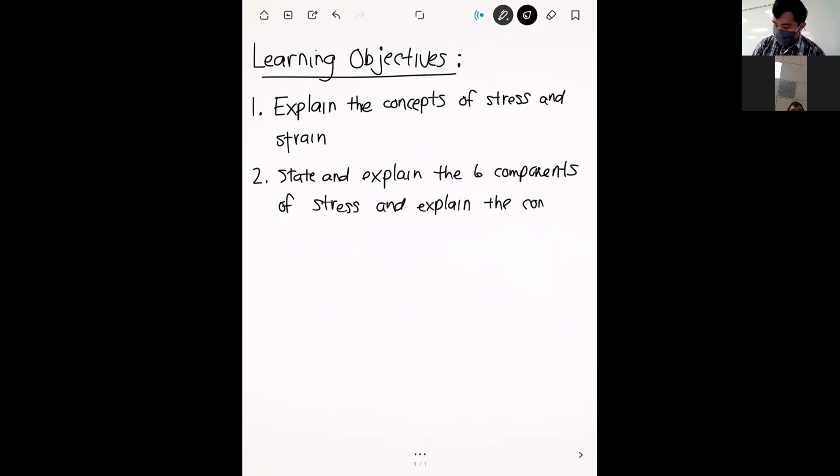Whatever, some of us made sure to point out that the provost came by the shop. I heard, yeah, she was super excited, and she was happy to make sure we got noticed as well. There was a big need there, but we had a few talking about it.

You mentioned every other week we'll be doing ANSYS work? Yeah, next Thursday is our next activity. Monday's out, early week, we're still trying to get our feet under us. We have class Tuesday, and next Tuesday we're finishing up these lecture notes, then Thursday we'll be doing an activity.

I had talked about the potential for sponsorship, we never had it before, and it had to do with something like communication, possible GPS or whatever. I said hey, might send them your way, Chris, because I know Wilbur deals a lot with radio and comms stuff, so maybe they could help. I know one of the GPS sites we have to use for cars.

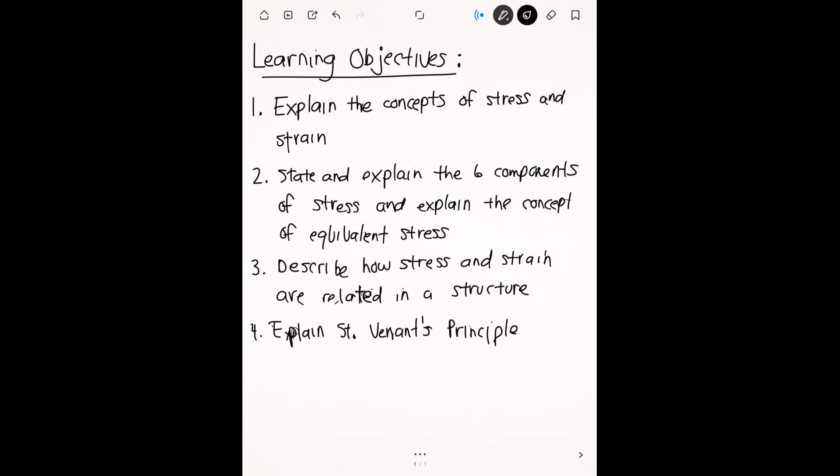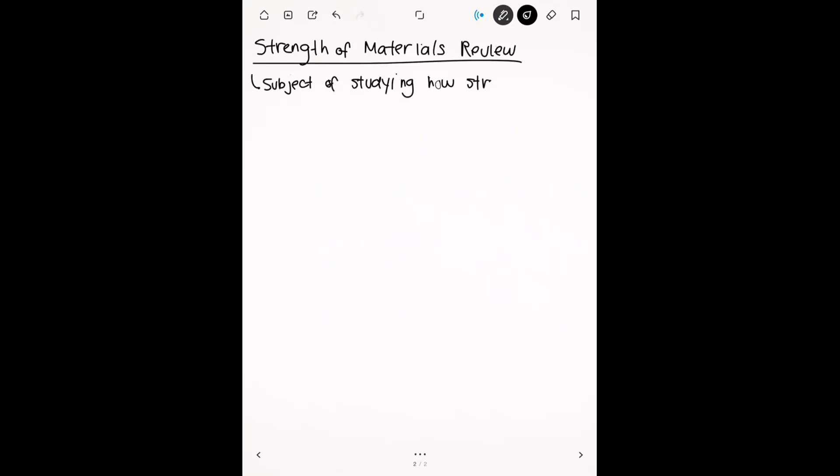This can be anything from bending your pencil inward to designing a bridge or a big building. All of those follow the same theory outlined in strength of materials.

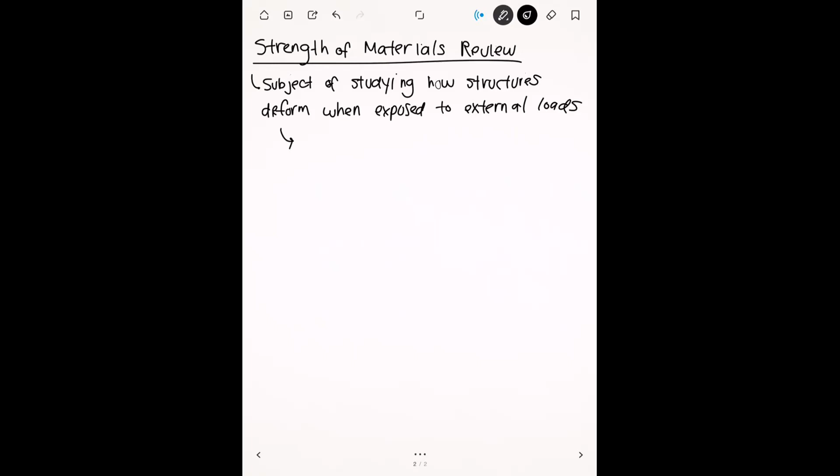A big determinant, or big factor, in determining how structures deform is the properties of the materials.

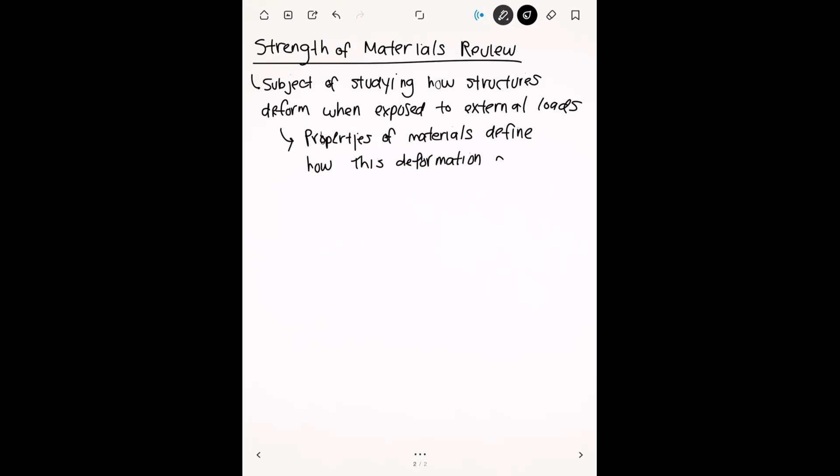We intuitively understand that different materials respond differently to different kinds of stresses. If you took a steel rod and tried to bend it, unless you're like the Hulk, you're not going to make much progress. But if you took a rod made of cheese and tried to bend it, it would bend pretty easily.

Central to strength of materials is the idea that stresses develop within these materials. So let's go over the concept of stress.

We've seen stress already. If you remember from our first activity, one of the results I asked you to show for the first ANSYS activity was how stress is distributed within that plate. We have a plate with a hole, we stretch it, and because we're stretching it, stress develops on the inside.

Let's start with the very basics, the units for stress. Stress, in its pure definition, is simply a force that's distributed over an area.

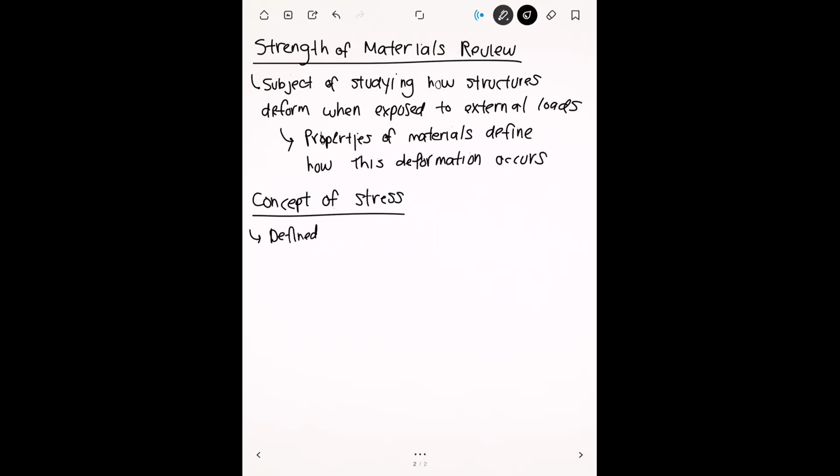Okay, and so its units is exactly that. Its units are going to be force divided by area.

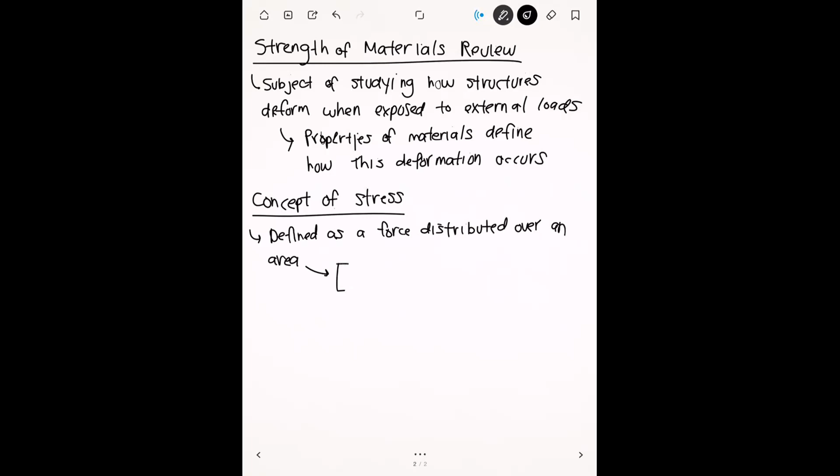This symbol sigma here, this is the general symbol that I use for stress. I think most people use sigma for stress, so it's not one of those ambiguous ones.

And so the units for that is going to be force over area. And if you want to put this in terms of SI units, the most common unit for that is going to be the Newton, which is a unit of force, over a meter squared, which is a unit for area.

And this has a special name because it was named after the guy that came up with it, right? So he was the genius that said, let's put force over area and let's name it after me. And so the SI unit for stress is the Pascal, abbreviated as Pa.

Stress, definition-wise, is pretty straightforward, but it's also not the only thing out there that has units of force over area. Another quantity that you might be familiar with is the whole concept of pressure.

And so pressure, if you remember from maybe like a fluids class or something, also has units of force over area. So one common question that I get a lot is, what's the difference between stress and pressure, and when do we use both? Because they both, unit wise and dimension wise, are exactly the same thing.

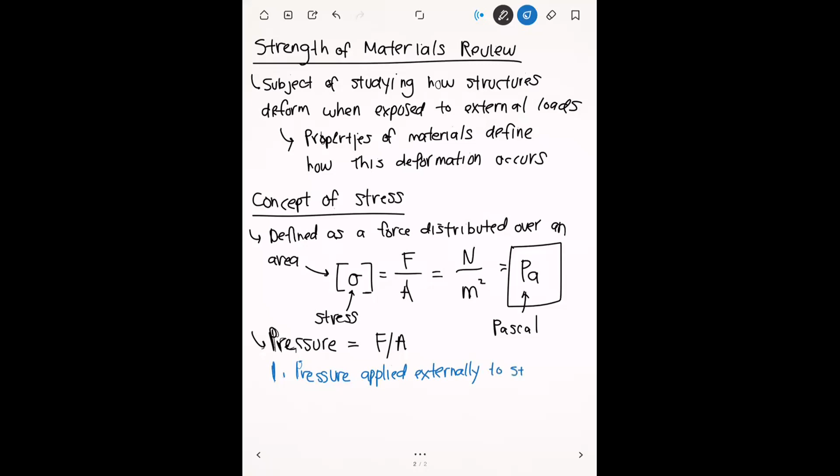So think about the boundary condition that we applied on our first ANSYS activity. To apply that tensile load, we applied it as a pressure, because that's an external force that we're applying onto our structure from the outside.

And so one way that you can remember this is you can think of pressure as something that's applied to you, right? So maybe like your professors are applying pressure to you by forcing you to do assignments and exams, things like that. It's something that's applied externally.

On the other hand, stress is something that develops internally to a structure in order for it to maintain equilibrium with its outside.

And so one way to kind of remember this is you can think that you develop stress, or you get stressed because of the pressure that's applied to you. Professors apply pressure to make you turn in homeworks, and you get stressed because you want to complete them. That's kind of how to remember the two of them.

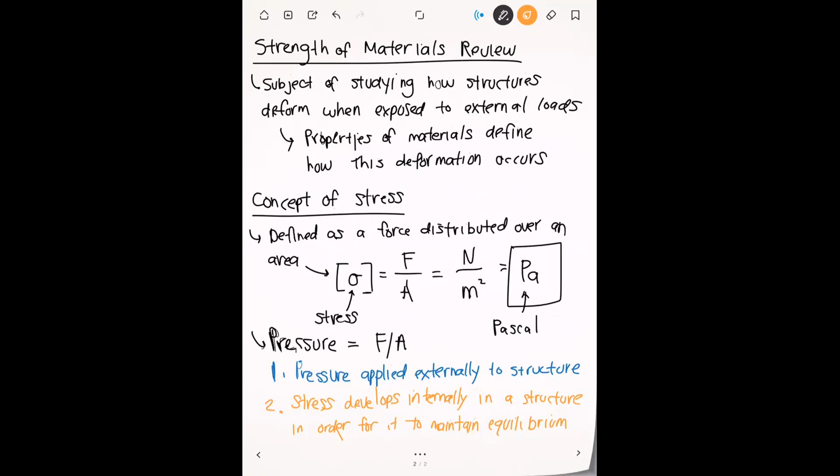All right, so let's do a simple example to kind of illustrate the whole concept of stress. You might have seen this example before in a previous class. Let's consider a simple rod that's in tension.

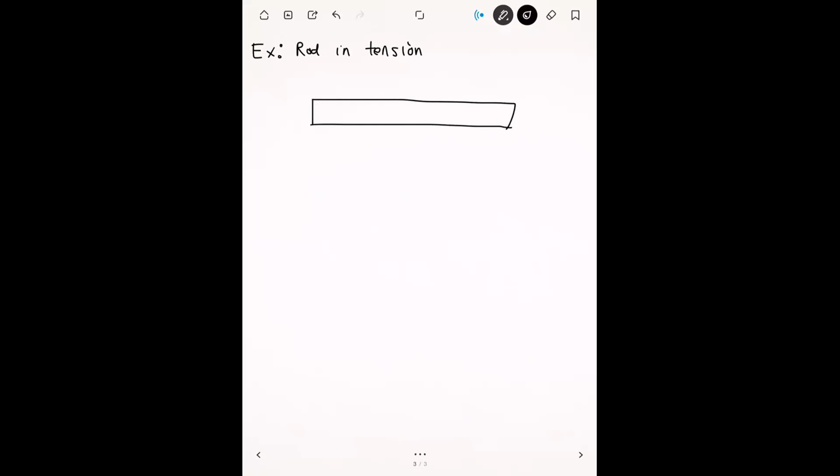We're pulling on the rod on both sides. And so we know that this rod is in static equilibrium because all the forces are going to cancel out.

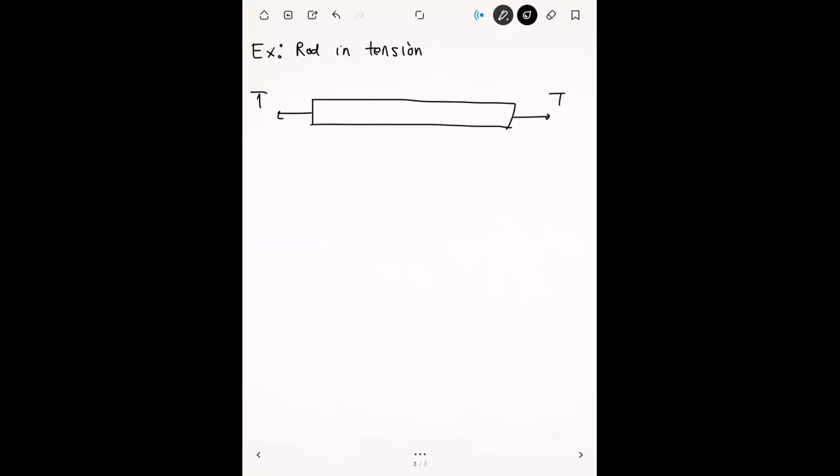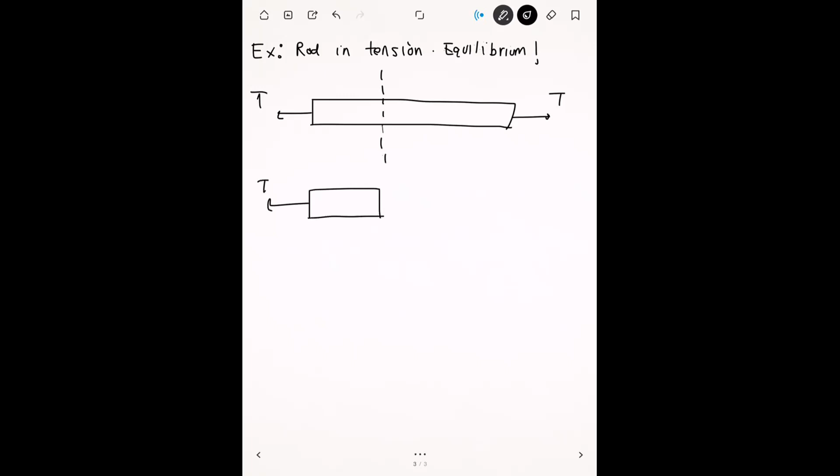And so when I say that this rod is in equilibrium, that means the entire rod is in equilibrium. And so that means if we slice this rod, let's say that we slice it like that, in order for this segment here to be in equilibrium, we also need to have some kind of force that opposes the tension like that.

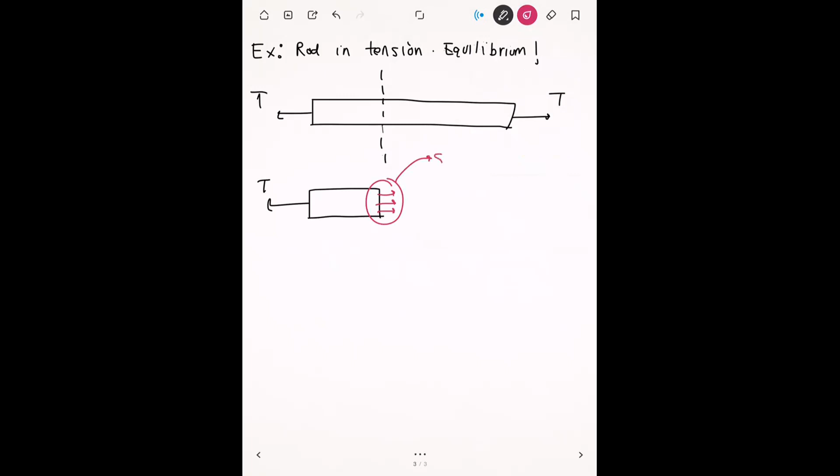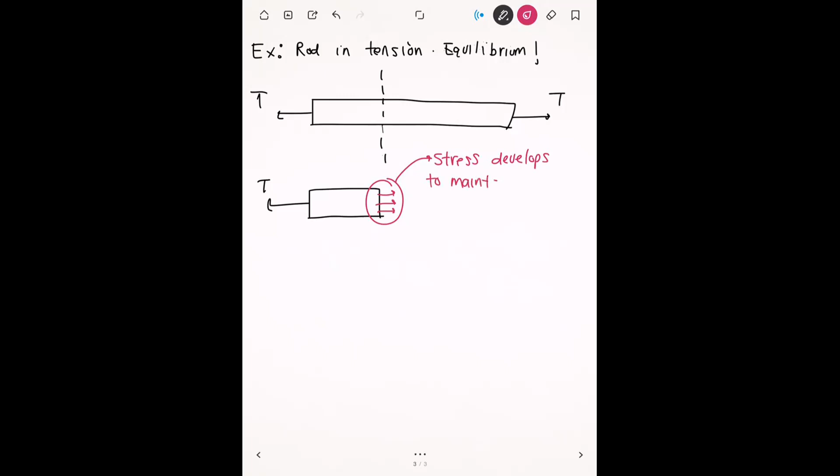And this internal force that's needed to maintain equilibrium, we call this the stress. And so we know that the symbol for stress is sigma.

And so just from a simple equilibrium equation, if we sum up all the forces here and set them equal to 0, we can come up with an expression for sigma for this case. On the left side, we have the tensile force T. This has to be equal to the stress multiplied by the area, because remember, stress is a force divided by an area, so in order to get force back from it, we have to multiply it by an area. This area, this A right here, is the cross-sectional area of the rod.

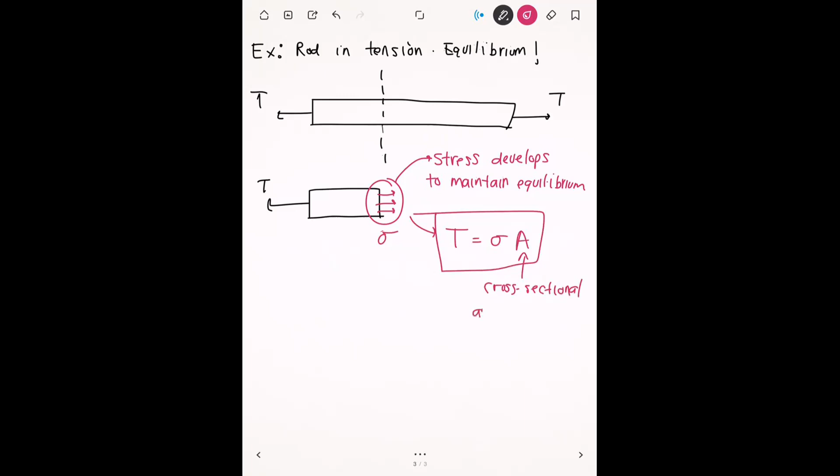Okay, right, so fairly straightforward. Okay, and so we have a situation like this where we have this straightforward equilibrium, right?

But I think a fair question to ask is, let's say we have the same kind of cross section here, and we have our applied load T. A fair question to ask is, why don't we just have another T that shows up inside the middle right here? Why don't we just have a point force that's there to oppose the load? Because in the end, you get the same thing, right? You get a situation of static equilibrium because both of those T's cancel out. So why don't we have this?

So why do we have to bother with the stress and multiplying by the area? The reason we don't have this is because whenever you have a structure with any kind of cross-sectional area, any forces it experiences are always going to distribute across the entire material.

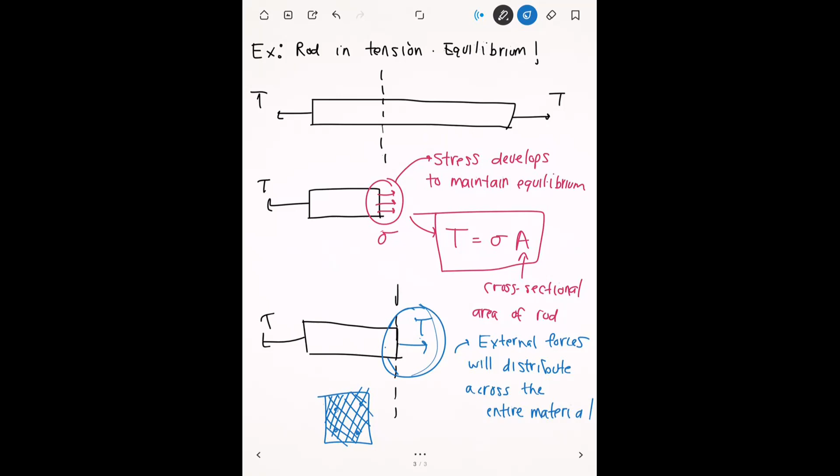And the way we express that mathematically is through stress. So when you're talking about forces internal to a structure, you usually talk about it as stress, because that encapsulates the fact that this force is going to be distributed very evenly across the entire material. Any questions on this? Okay.

All right, so let's go over the different kinds of stresses you can see. There are two different kinds of stresses I want to talk about based on the direction they act. The first type of stress is a normal stress, which is actually the one we saw on the previous page. A normal stress acts perpendicularly to a surface. So if you have a surface that's vertical like this, the normal stress is going to act horizontally to it.

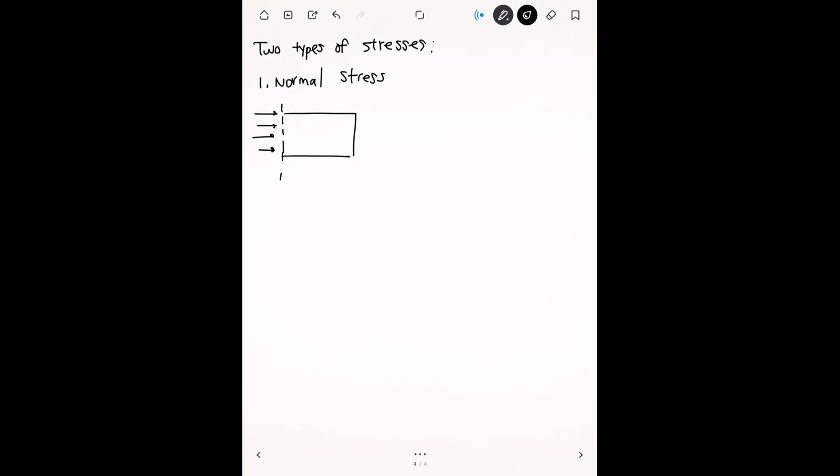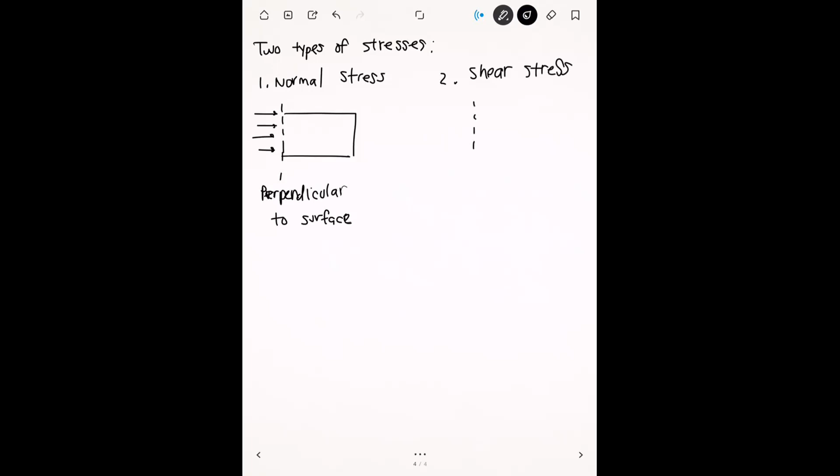The other type of stress that we have is a shear stress, and the shear stress acts parallel to the surface.

Stress is actually a pretty complex state, so it's not just a single value that a structure experiences. It depends really strongly on the direction as well — whether the direction is parallel or perpendicular to the surface, but it also depends on the Cartesian directions too, so it depends on X, Y, Z.

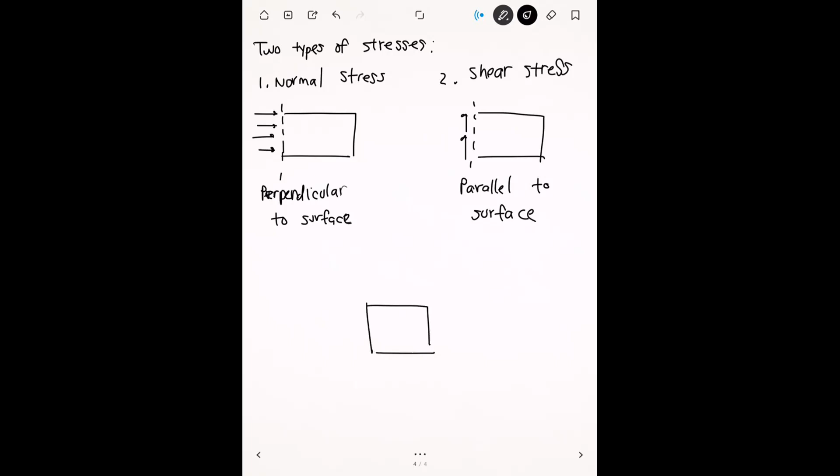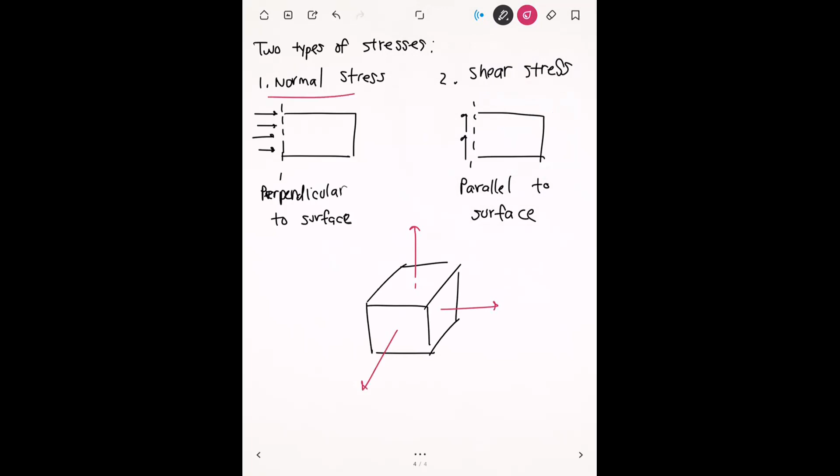So if I draw the most arbitrary case — if I draw a cube like this — this cube could represent a small particle that may be on the inside of your structure. This cube is going to experience normal stresses and shear stresses as well. The normal stresses I've highlighted in pink, and the shear stresses I'll do in blue. You can see that all the normal stresses act perpendicular to the surface on which they're acting, whereas the shear stresses are parallel to it.

So in addition to having two different kinds of stresses, we can also characterize the stresses in terms of which direction they act.

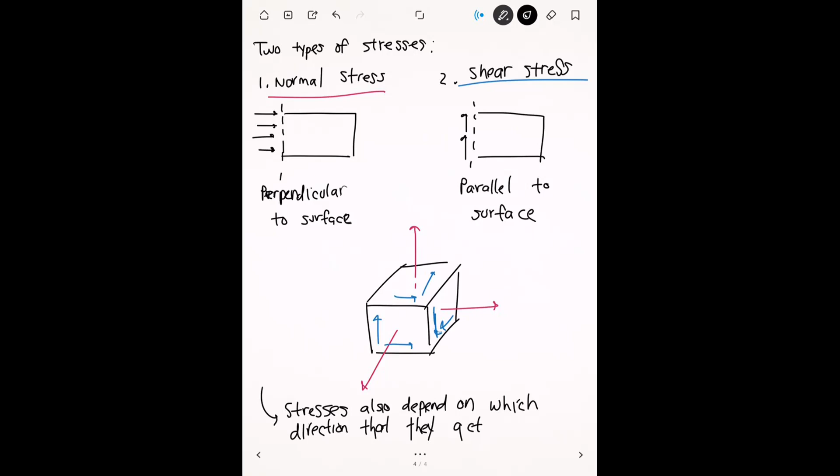All right, so let's talk about the stress tensor then, just to write it down so we're on the same page. The stress tensor is a mathematical quantity which represents all the complex state of stress that can happen in a structure. We give it the symbol sigma, and it's a matrix, so I put a line under it. This matrix is 3 by 3, at least in an arbitrary case for a 3-dimensional solid.

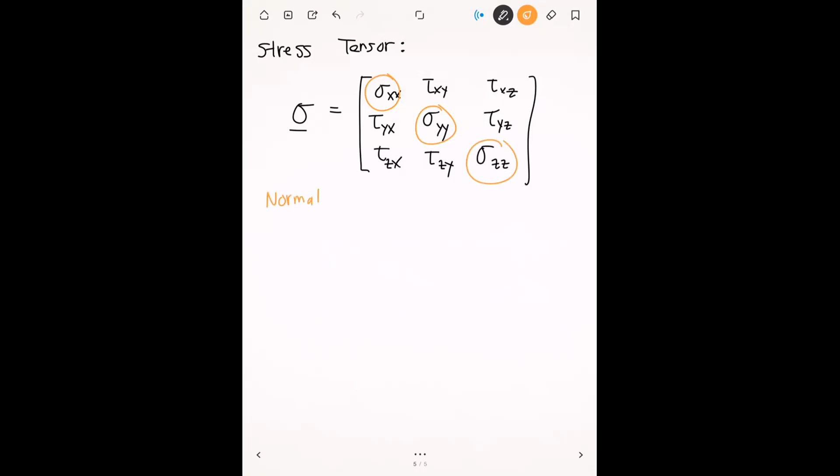That's our stress tensor, and we know there are 9 components. Everything on the diagonal here, those are our normal stresses, and everything on the off-diagonals, these are our shear stresses.

One thing we know about this in particular is that this stress tensor is symmetric. So tau xy is equal to tau yx, tau xz is equal to tau zx, and tau yz is equal to tau zy. So in the end here, we only have six unique components, and the other ones are just mirrored across the diagonal.

So in summary, what I want to illustrate to you guys is that stress is complex. When you're describing stress within a structure, there are lots of different things to account for and lots of different stress components.

Let's bring this back to our ANSYS activities. In our ANSYS activity, what I asked you guys to show was the equivalent stress distribution within the solid. If you remember from the activity, when you were looking at the equivalent stress, you were looking at kind of a heat map of where stress was highest or not, and there's a color bar on the outside showing what red represents, what orange and green represent, and so on.

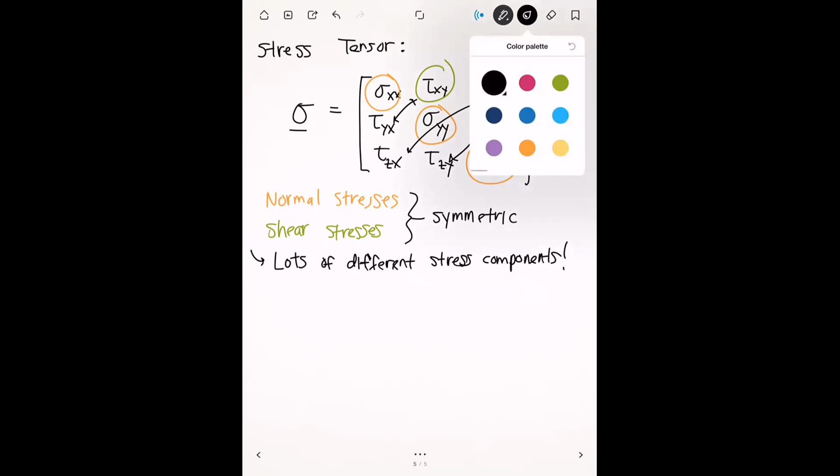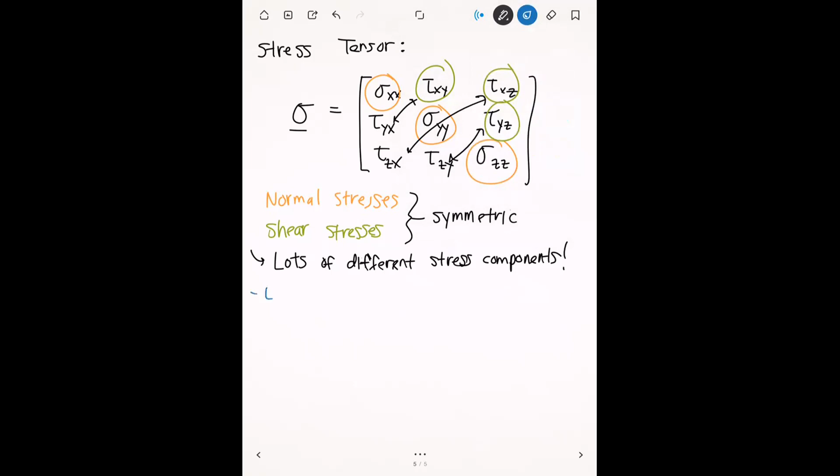But what I want to highlight to you guys is that when you're viewing those results, when you're viewing the equivalent stress inside ANSYS, you're only viewing a single number. Okay, same for the principal stress too - the maximum principal stress.

If we're only viewing a single stress value inside ANSYS, then I think a fair question to ask is: which stress are we viewing? Because we have six here. Are we viewing this one? Are we viewing this one? Is it going to be sigma ZZ? Is it any of the shear stresses? If we're only viewing a single stress, the question is which one are we viewing, and which one is actually most important for us to see?

The answer to this is that you're kind of viewing all of them at the same time. What I mean by that is you can take the 6 different components here and put them into a formula to compute just a single stress value. I'll call this an aggregate stress value.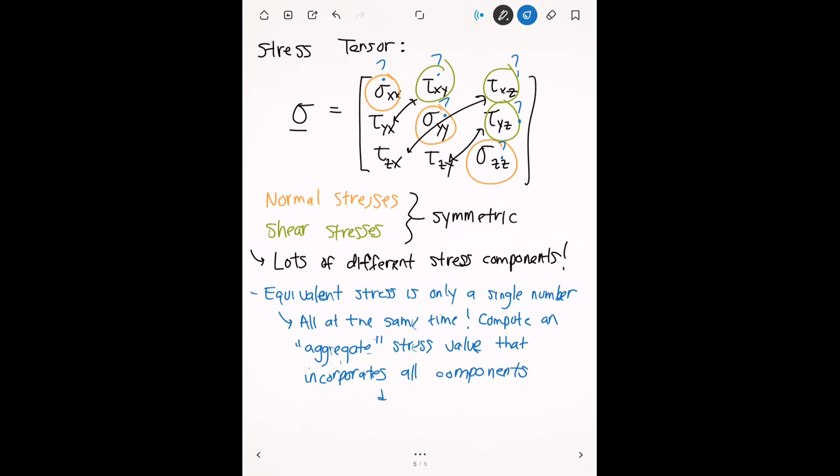So there's a formula that ANSYS is using underneath the hood that incorporates all these different stress components. The formula that ANSYS uses for this is called the von Mises condition. That's why in ANSYS, when you view the equivalent stress field, it calls it the von Mises stress.

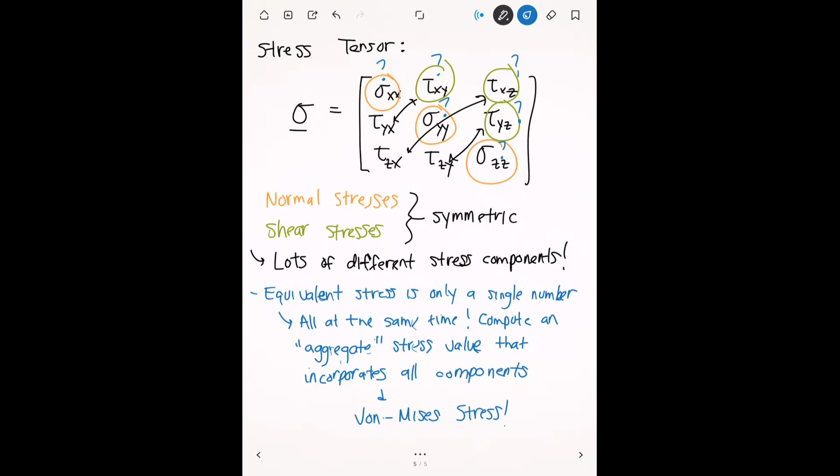On the next page, I'll write out that formula for you, just so it's not something you have to memorize, and it's not anything we're actually going to manually compute ourselves. But it's mostly for your reference, so you know exactly how it takes into effect all the different shear components and the normal components. Any questions on this? All right, so here's the formula for the von Mises stress.

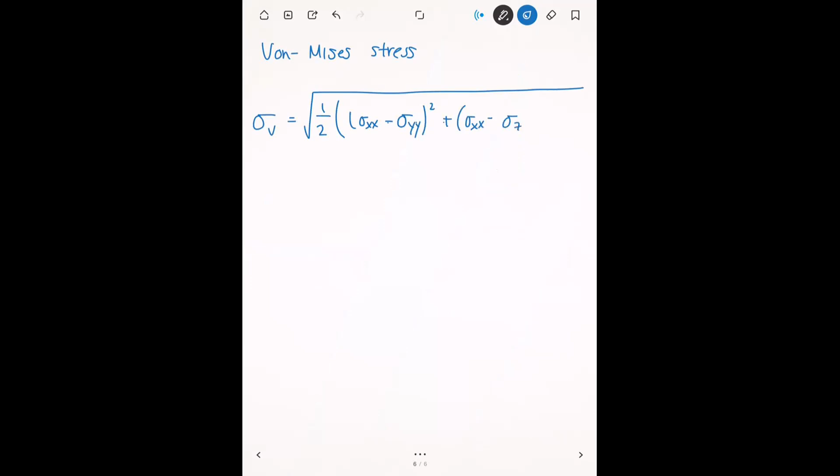We'll call this sigma V. We take the square root of 1/2 times the sum of the following: sigma xx minus sigma yy quantity squared, plus sigma xx minus sigma zz quantity squared, plus sigma yy minus sigma zz quantity squared. So for every combination of the normal stresses, you take the difference and square them, plus 6 times each of the shear stress components squared.

So we have tau xy squared plus tau xz squared plus tau yz squared, one more parenthesis, and this is all under the same square root. I kind of ran out of space, but all of this is under that square root. This isn't something you need to memorize or compute by hand, it's just for your reference, so when you ask ANSYS to compute equivalent stress, now you know exactly what it's computing for you.

All right, so that's the von Mises stress. Now the question is, how do we actually use this? We've looked at the von Mises stress inside our plate, and it's something we're going to continue to look at for the rest of the semester. A fair question to ask is, what is this actually used for, or why do we even care about the von Mises stress to begin with? The most common way that we use the von Mises stress, or equivalent stress, is to determine whether a structure is going to fail or not.

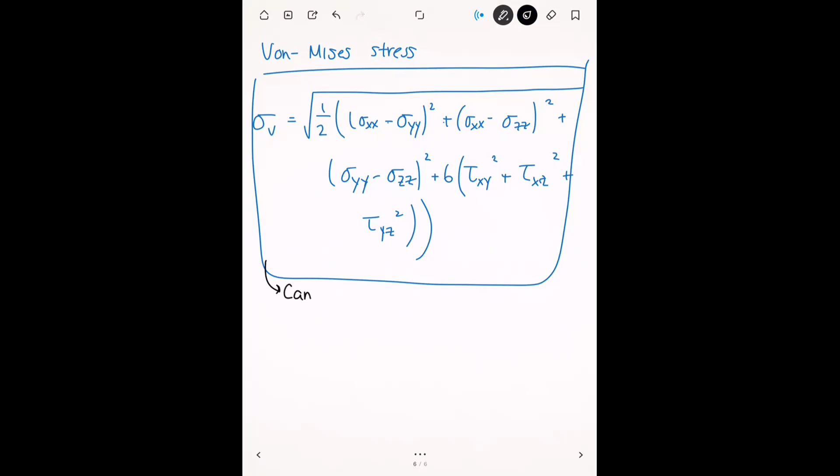We'll do this in the activity next week. One thing you can look up for every material is a parameter called the yield strength, or yield stress. The yield strength is a value of stress, and what it tells you is that if the equivalent stress ever exceeds the yield strength, then the structure is going to fail.

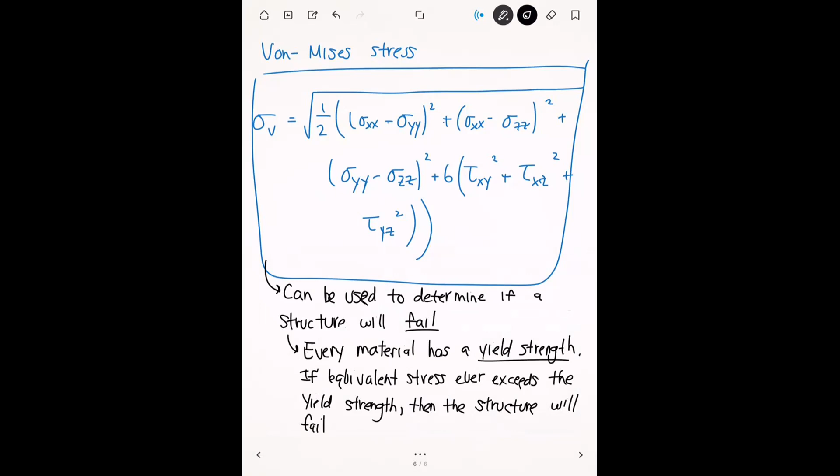Next week we're going to do an activity where I'll have you guys do a finite element simulation of a bike crank. The bike crank will be subjected to a certain amount of load, and I want you to determine whether it's going to fail under those loads. Once you have that information, you can make some comments on the bike crank's design. If you determine it's going to fail, you can modify the design to make it stronger. Or if the bike crank is very far from failing, very safe, maybe you can shave away some material from it to cut down on manufacturing costs. So that's a little sneak preview of what we're going to do next week.

Any questions on this?

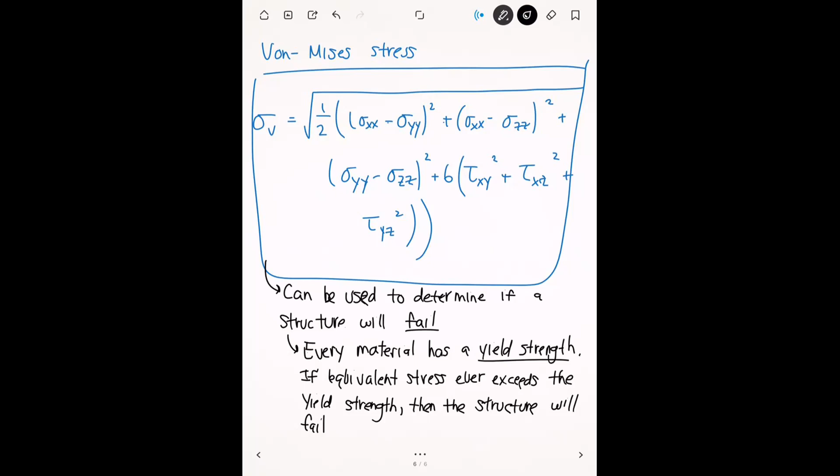All right, so that's stress. Now let's go over the concept of strain. Strain is the other important quantity for strength of materials that we need to know. The whole idea with strain is that it's a measure of how much a structure is deforming relative to its original configuration.

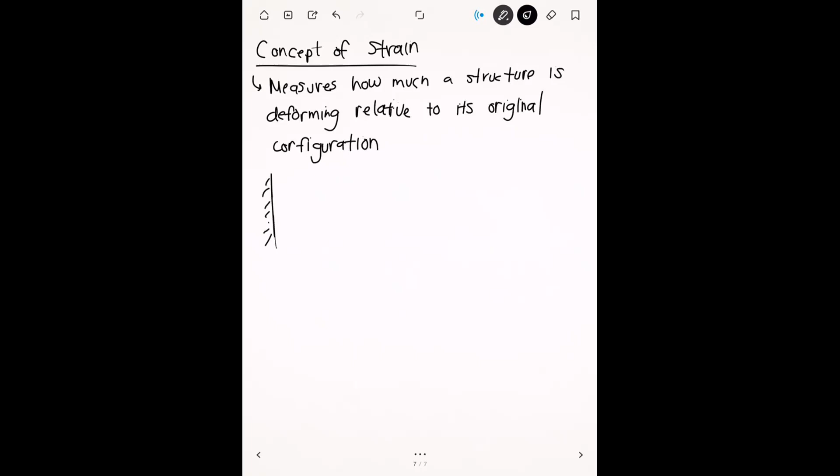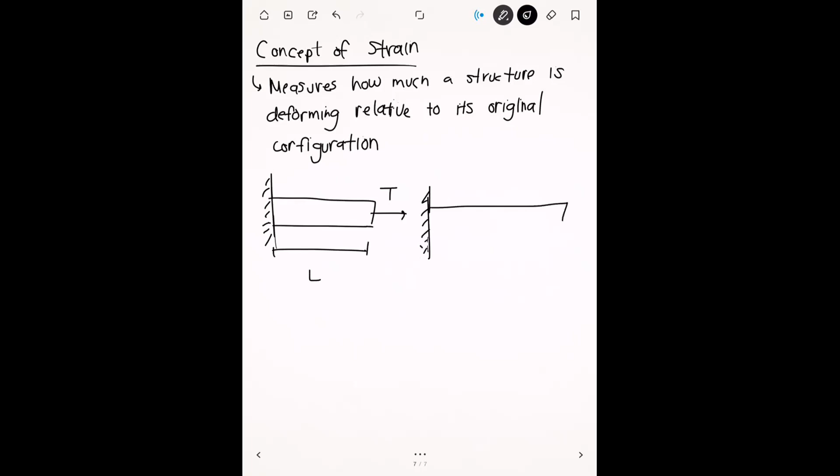The classic example, probably the easiest one to understand, is if you have a rod that's fixed to a wall, and this rod has some initial length L, and let's say you're pulling on it with a tensile load T. In response to that load, the bar is going to get longer. So the original length was L, and in response to the load, it increases in length by an amount delta L. The strain in this case is just going to be the change in length, delta L, divided by L, the original length.

So the important thing about strain is that it's unitless, it doesn't have any units because we basically have a length divided by the length. That's always going to have no units, because remember, it basically represents a relative change, and whenever you have anything relative, you're taking the ratio of one thing over another thing, so it's always unitless. This is an example of strain in a 1D case, but in 3 dimensions, strain can be a 3D thing.

The mathematical definition of strain is that you take the displacement, which is u, and then you take a derivative of the displacement in every single direction. This is basically how ANSYS is defining the strain under the hood, and this ends up being a matrix as well, or a tensor.

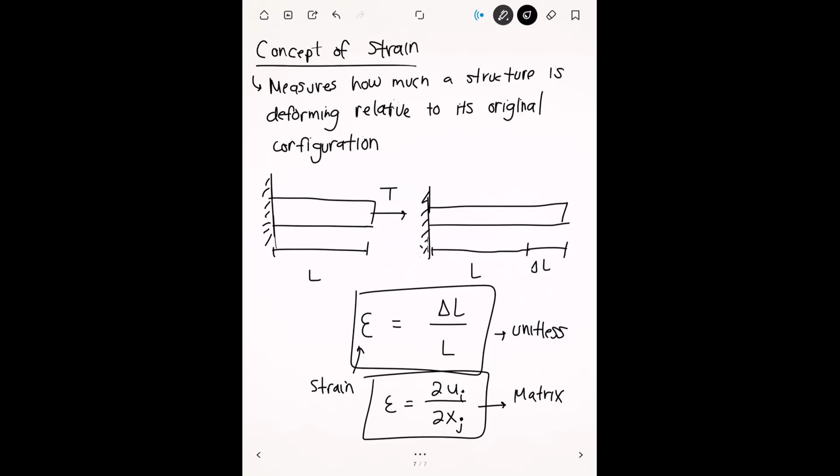Any questions on strain? All right, so stress and strain are very intimately connected inside a material. Not only do they have similar mathematical definitions, but they also have a strong effect on each other too.

Actually, the exact relationship between stress and strain is determined by what type of material you have.

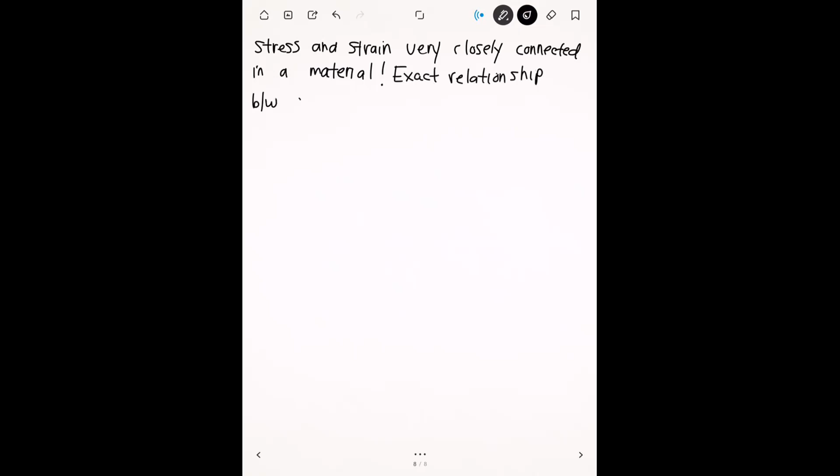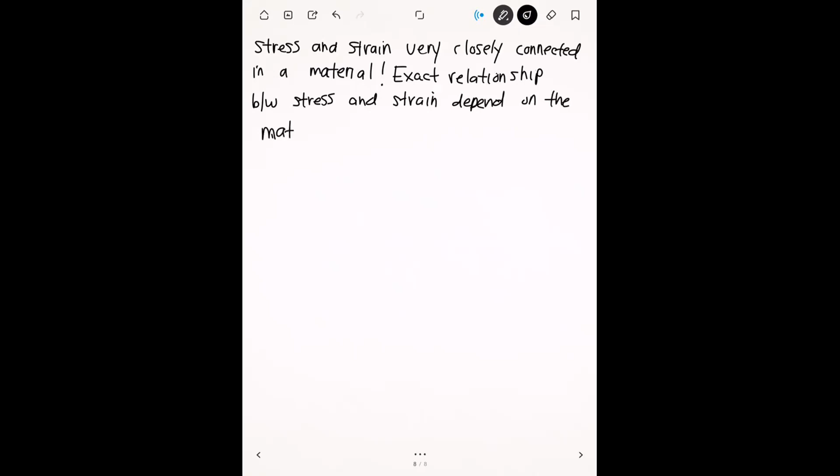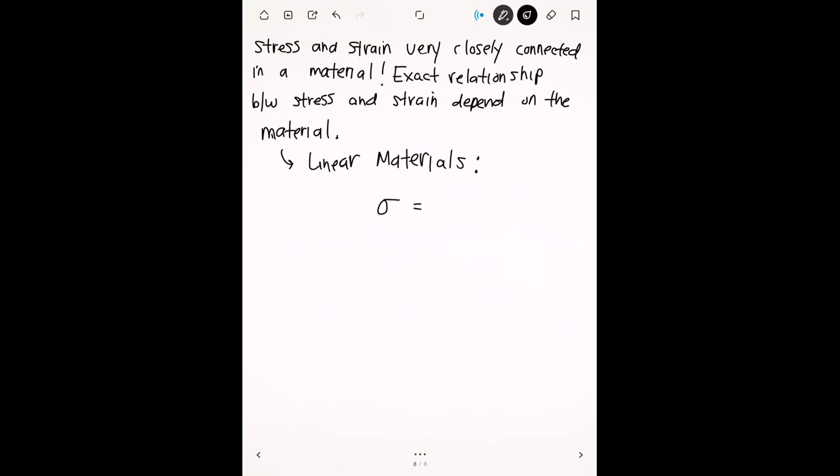The simplest relationship between stress and strain is a linear one. I think it's the first one that everyone learns in their strength of materials class. For linear materials, which covers most of your metals - most metals are linear because of their molecular structure - we have that the stress is equal to the Young's modulus multiplied by the strain.

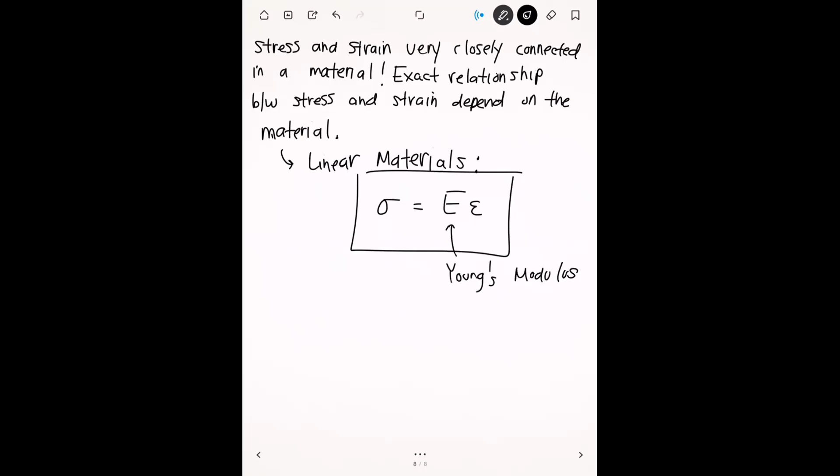I think we went over this equation on Tuesday. This linear relationship is known as Hooke's law. This is the simplest case where in order to get stress from strain, the only thing you have to do is multiply by a number, and that number is the Young's modulus.

But it can definitely get a lot more complicated than this, especially when you talk about things like composite materials, anisotropic materials. One that's becoming a lot more popular nowadays is 3D printed materials. 3D printed materials, just by the nature of how they're manufactured, very rarely follow this relationship - a lot of times you have to take the printing direction into account when modeling those materials. But if you're talking about a pure metal manufactured in a traditional way through milling or cutting or lathing, this relationship holds pretty well.

A lot of the problems we're going to do in this class will be for linear materials, but we will talk about what you would need to do for different kinds of materials as well. So any questions on this?

All right, so let's go over the concepts of principal stress, because I did ask you guys to look at principal stress for the assignment as well.

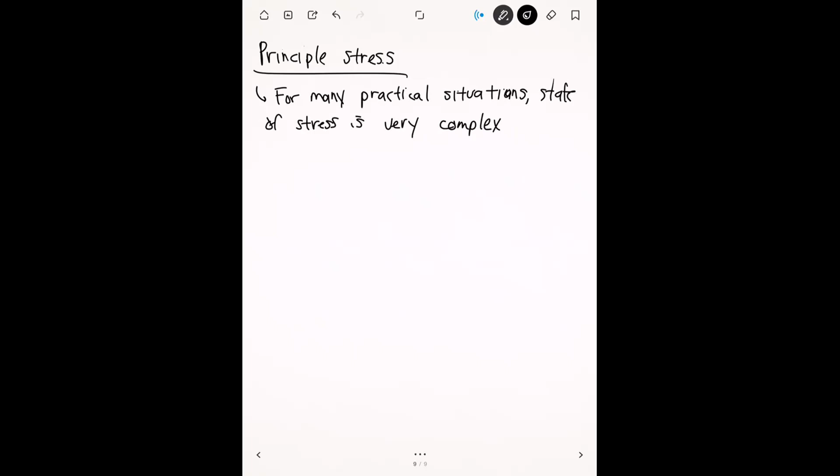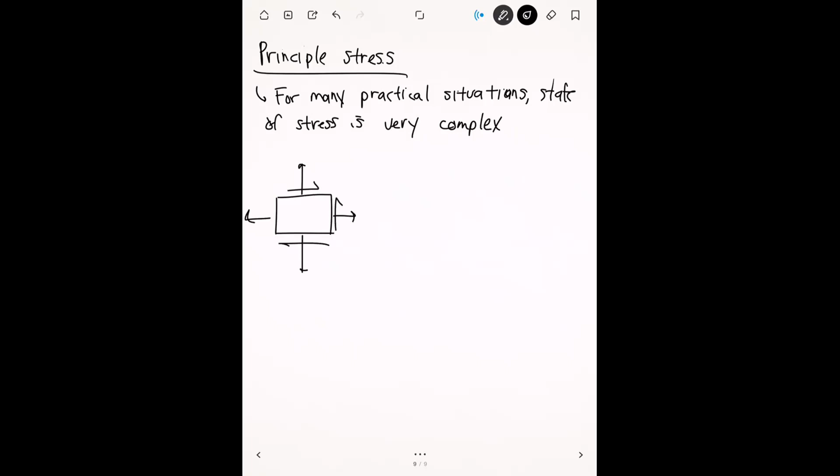Let me do a 2D case so you can see what's going on. Even in a 2D case, we have lots of different stress components: all the normal stresses acting normal to the surface, but also all the shear stresses acting parallel to it. This is complicated because if you're considering all the different stress components, there's a lot to keep track of. So a lot of times we like to simplify this, so we can examine a simplified version of the state of stress.

One way to simplify the situation is to simply perform a rotation. If we rotate it, and we're a little bit smart about how we rotate the state of stress, we can reach a state where there's no longer any shear stresses. The idea is to take the same patch of material and perform a small rotation, such that all the shear stresses either cancel out or get added into the normal stresses. In the end, we end up with a situation with just normal stresses.

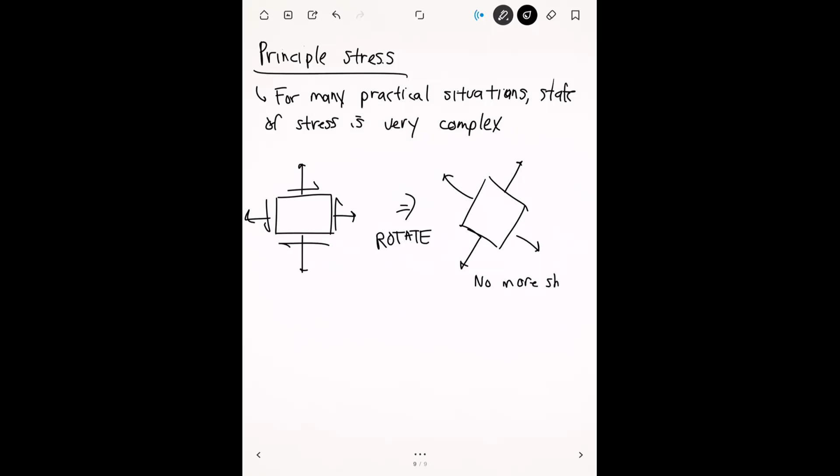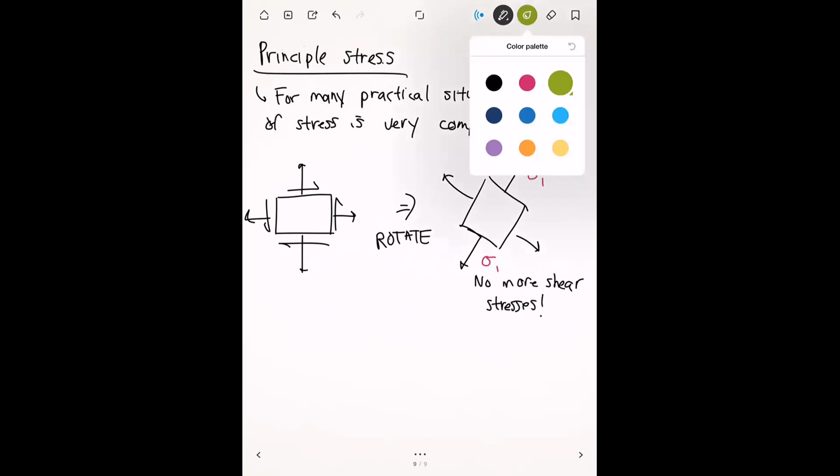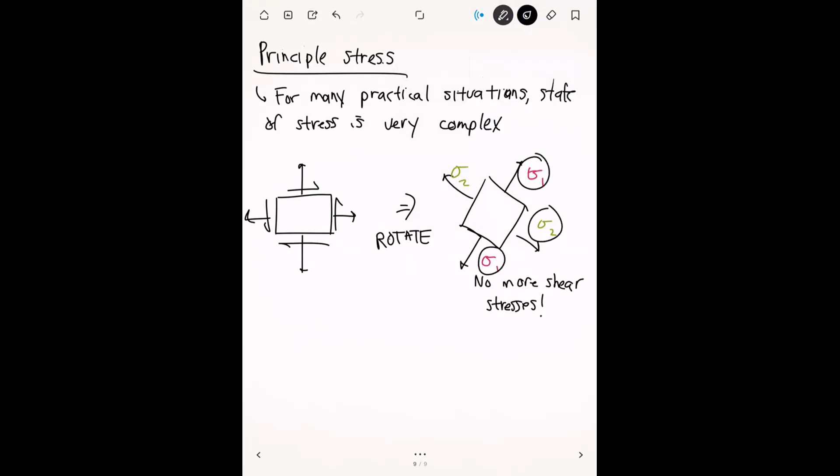We get a situation where we can characterize all the different normal stresses. I'll call those two sigma 1, the first principal stress. And then the ones on the perpendicular faces we'll call sigma 2, the secondary principal stress. This is convenient, because instead of looking at this really big stress state, we're looking at these ones, describing the stress state in terms of these principal stresses. In 2D we have 2 principal stresses, but in 3D we actually have 3.

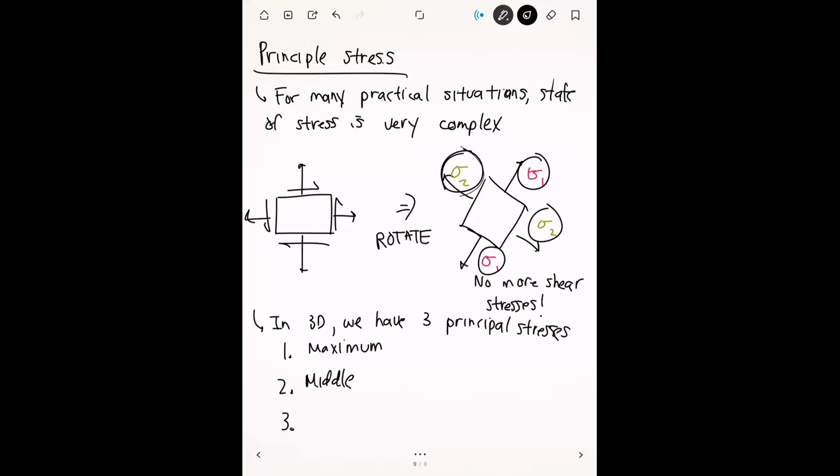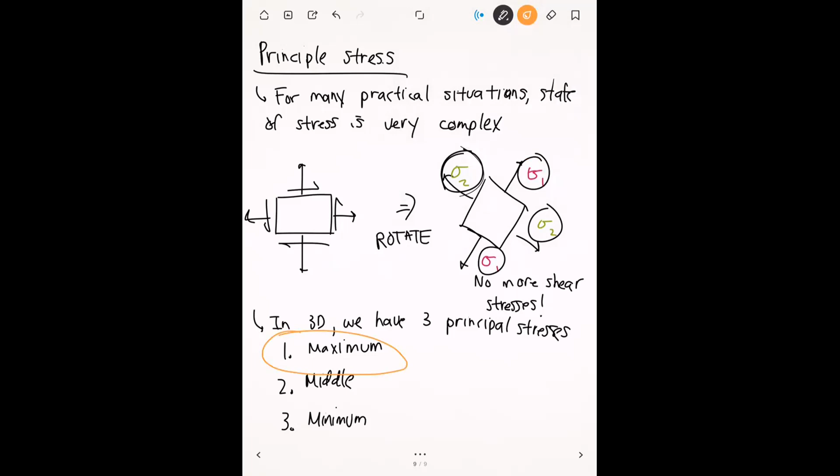Their names are based on what their numerical values are: you have the maximum principal stress, the middle principal stress, and the minimum. What I asked you guys to do in the activity was to find the maximum principal stress, which is basically the maximum of the 3 principal stresses that you got from performing this rotation.

Again, principal stresses aren't often used for anything super practical, just because it's more of a mathematical and theoretical thing, a flex, I guess, that you can rotate and get into this weird stress state. But it's kind of a cool thing to look at, because one interesting thing to do is compare the maximum principal stress to what you got for the equivalent stress.

Remember, the whole point of principal stress is that it transforms your stress state into basically a normal stress, and normal stresses are going to be either compressive or tensile. So if you compare the maximum principal stress to the equivalent stress and they're similar values, you can say the biggest contribution to the equivalent stress is mostly from compression or tension. But if they're different, you probably have a big contribution to shear to your equivalent stress.

But there are also better ways to determine whether you have shear stresses or normal stresses. This is just so you guys know what principal stresses are and how to differentiate them from equivalent stresses.

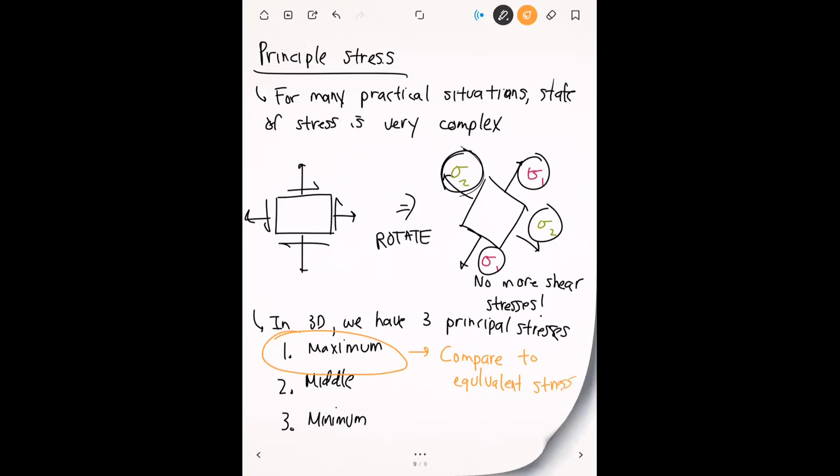That's different from the maximum principal stress. Imagine a generic structure, let's say we have our plate with a hole like this, and we want to find the stress at this point right here. There are three principal stresses here: the maximum, the middle, and the minimum.

So when I say to find the maximum principal stress, that means find the distribution of that first principal stress everywhere. But when I just say maximum stress without anything, I mean the maximum equivalent stress and where it is on the structure. It's a little bit of word ninja stuff, but once you understand the difference between them, it becomes more clear.

All right, any questions on this? Okay.

All right, so let's talk about stress strain relationships. We talked about the linear one before. We've seen that there are materials out there where the stress strain relationship is linear. And if you plot the stress strain curve, it looks something like that.

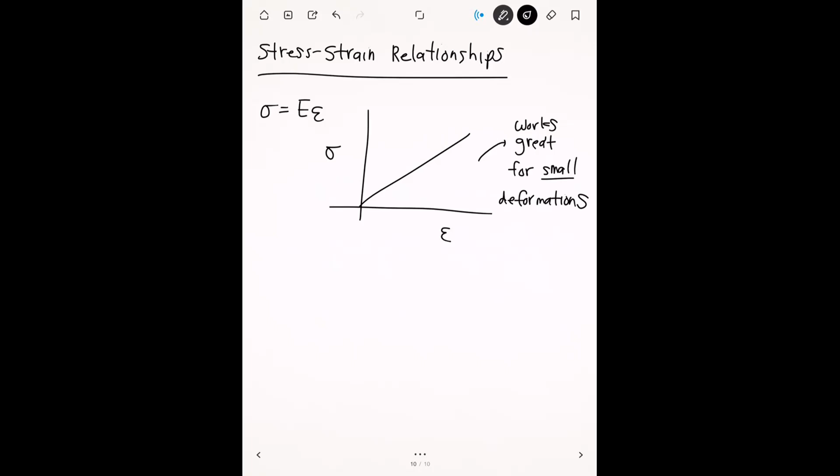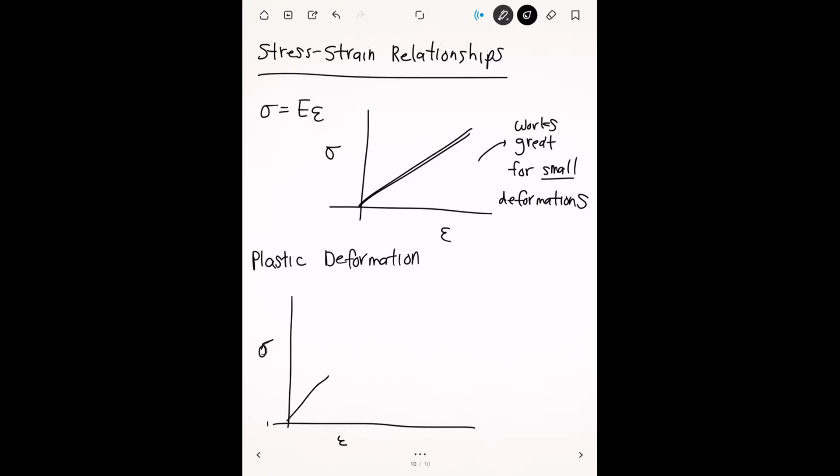But once you start getting away from small deformations, once your deformation starts to get larger, you have to start taking plasticity into account. Probably you guys know already that once you get past this linear regime here, the stress strain relationship is no longer linear. There's always a linear portion right next to the origin, but once you reach a certain threshold, the stress strain relationship starts to look something like that. This right here is plastic deformation.

So there's a way to turn this on within ANSYS, because if you don't turn it on, ANSYS won't account for it.

In ANSYS, there's a toggle or checkbox for large deformations. If you have a situation with large deformations inside your model, you have to make sure this setting is turned on so you can actually simulate that. Because if you don't, ANSYS is basically going to assume that this linear relationship will maintain all the way until infinity.

If you draw a dotted line, ANSYS is going to assume that this linear relationship continues all the way up here, even though in reality the material was going to reach plastic deformation way before that. So you need to make sure that if you do have large deformations, you turn that setting on, and we'll go over this later on in the semester too.

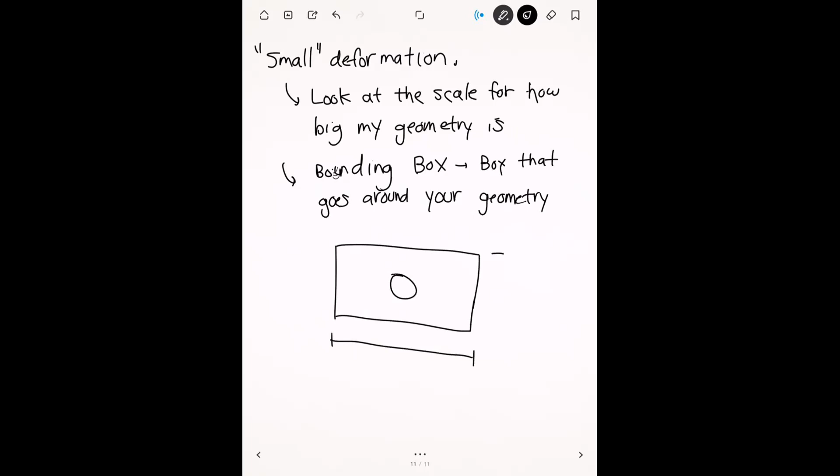So let's take our plate with the hole as an example. If you remember when we were setting this up, the length of the plate in this direction was 300 millimeters, and the length of the plate in this direction was 200 millimeters.

So if we consider just a small 2D box, which in this case would just be an envelope, the envelope would be 300 millimeters by 200. This one's straightforward because our geometry is actually a rectangle, but if you have an oblique or awkward geometry, think of putting it in a cardboard box. This is something you can look up — ANSYS automatically computes this for you.

Once you have the bounding box and get an idea of the scale of your geometry, what I usually like to do is take one of these numbers — usually they're on the same order — so let me take 300 here. I multiply my biggest dimension by 0.1. If you do 0.1 times 300, you get 30 millimeters.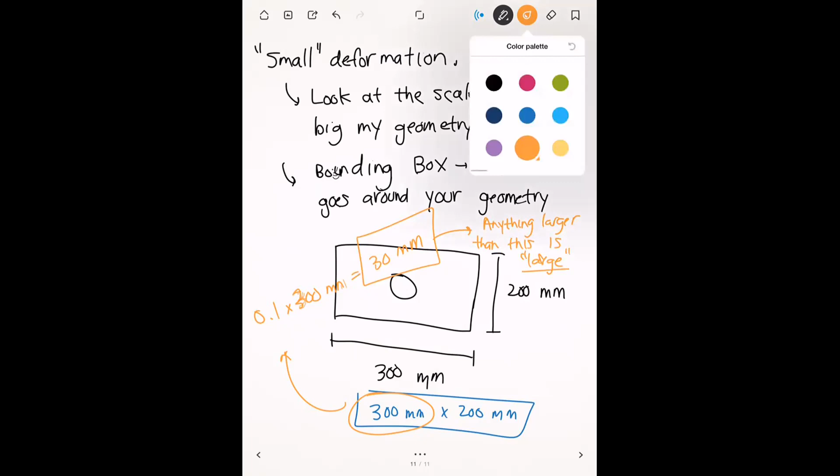If you run your simulation and see something like 35, 36 millimeters, then your deformations are getting pretty big at that point, and you might want to consider turning on large deformations. So that's generally my rule of thumb — roughly 10% of the largest dimension, yeah, that's my own rule of thumb.

Everyone else kind of has their own rule of thumb, and as you do more and more of these, you build more intuition for what looks large and what doesn't. But I'd say as a starting point this is a pretty good place to start, because finding your bounding box is really easy to do in ANSYS, and taking 10% of that is straightforward. If you take 10% of your maximum dimension and see deformations bigger than that, you're probably outside the linear regime, because your structure is really deforming a lot. Of course 10% is my own personal number — some people might use a lower one, like 5%, some might use 20%. But I think 10% is pretty reasonable, and it works well for most materials too.

So the biggest dimension works well when all your dimensions are pretty much the same, like 300 and 200 being pretty close. But if one of your dimensions is much bigger than the other, I would probably take the smaller dimension for that one.

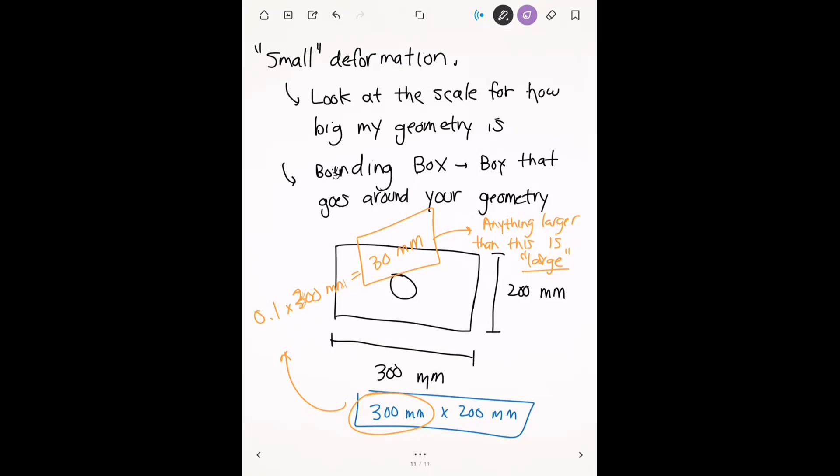Any questions on this? All right, so now let's go over the large deformation setting.

Why don't we just always turn this on? Because if we turn it on, we don't have to worry about estimating the largest deformation, doing this 0.1 thing, or whatever. If we can just always turn this on, ANSYS is going to know what to do. So kind of the simplest answer to this question is that if you're going to do a large deformation simulation, those can get pretty expensive.

If you're considering plastic deformations, from the modeling perspective, we call it a nonlinear type of analysis. Those are much more difficult to actually compute than a linear one, which is a lot cheaper.

If you're only doing maybe one or two simulations of a large deformation, then it's fine. But the way a lot of people use finite elements is they kind of tinker with their designs and run simulations constantly. If you run a linear simulation, it might take maybe 30 seconds to complete, but a nonlinear one can take 3, 4, 5 minutes.

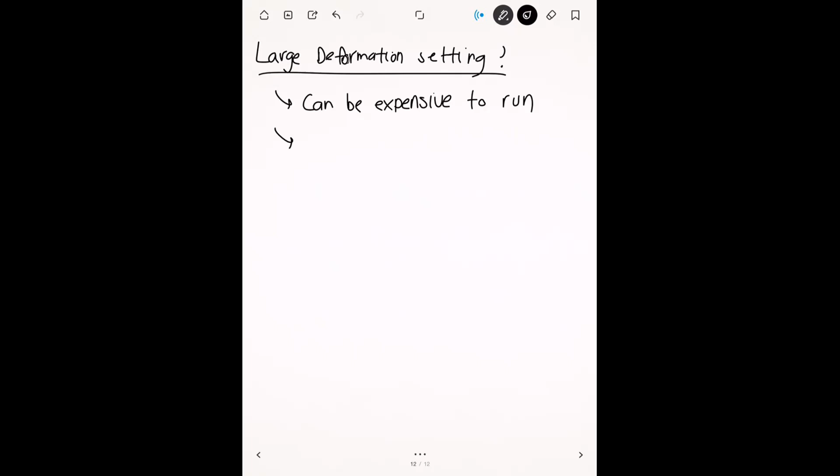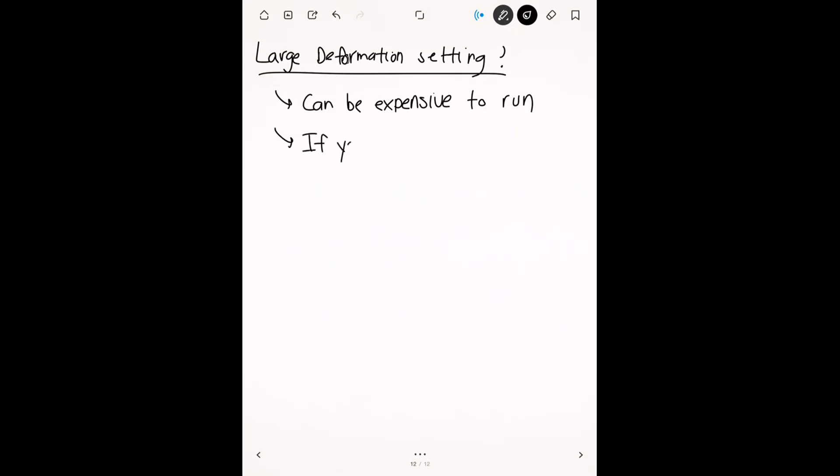That's kind of the biggest reason why it's not used that often. The other thing you might run into is if you're defining your own material, setting a custom material property. You do this quite a lot because ANSYS doesn't come with that many materials in its library. If you're setting your own custom material within ANSYS, you have to supply all of the data and all of the parameters needed for plastic deformation as well.

Professor, if you're transferring a model from SolidWorks into ANSYS and you already set the materials on SolidWorks, will that transfer over too?

Yes, so that's one nice thing about doing SolidWorks parts, is that the material does transfer from SolidWorks to ANSYS. But if you're not using SolidWorks, or you're using one of the CAD softwares within ANSYS, then supplying the right material properties is something you have to do. So that's one thing you have to be careful of.

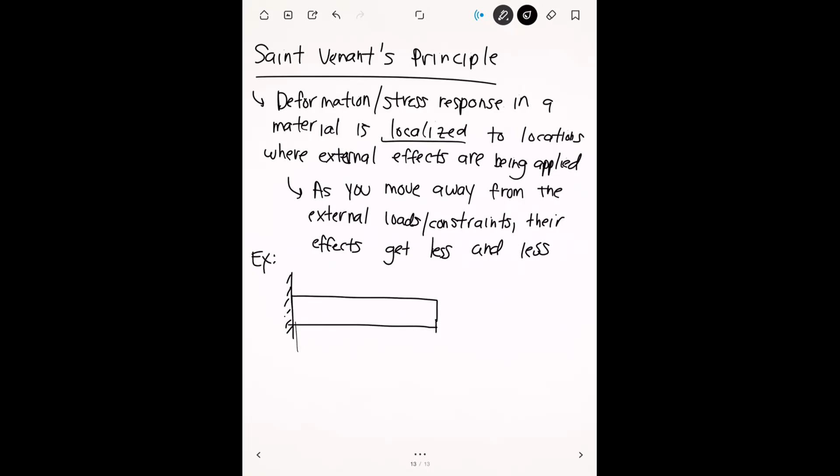So this is how I would use St. Venant's principle in a general way to help me check my finite element results. Here I have a cantilever beam, and let's say that I'm going to apply a load at the end of the beam, just like that.

What I can see here is that there are basically two locations where we're applying external effects. We have the left side of the beam, which is where we're constraining the beam, right? That's an external effect that we're imposing on the beam.

On the right side, this is where the load is being applied. So this is another area of the beam that's right next to an external effect. Even before running a finite element simulation, I can already tell where the areas of interest of the beam are going to be, just based on how close they are to the boundary conditions.

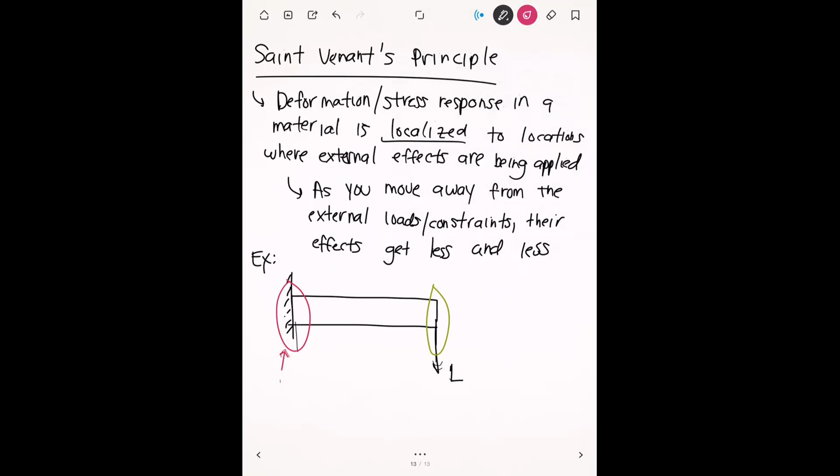For this case, I've run beams a bajillion times, so I kind of know the answer already. But what I can tell you from this figure is that on the left side of the beam, where we fixed it, this is where stress is going to be concentrated.

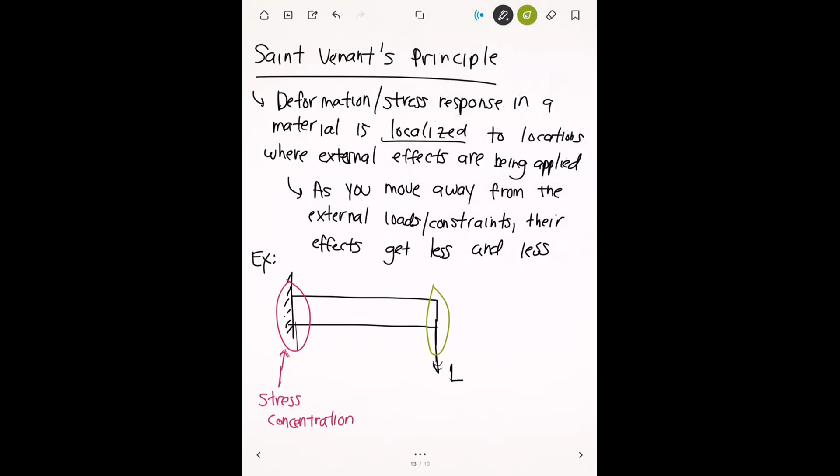So that's one area where we're going to see an interesting solution there - I put interesting in quotes. And then on the right side of the beam where we're applying the load, this is where deformation is going to be applied.

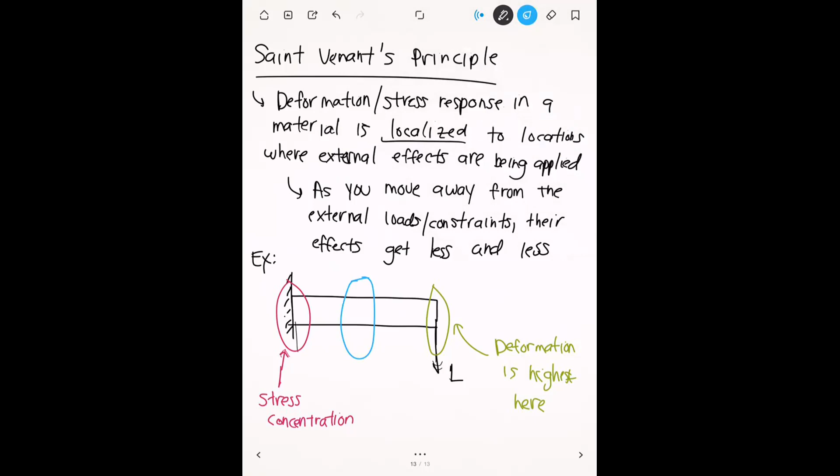That's going to be another interesting area in our solution, because that's where a boundary condition is being applied. And so if you look at the areas farthest away from the boundaries, in the middle of the beam, this is where things are generally not as interesting, right? You don't have very high deformations there, and the stress is going to be kind of low.

Usually a lot of times, the middle of the beam, or as you get farther away from the boundary conditions, it's not going to be as exciting. The reason for that is because it's farther away from where the boundary conditions are applied - it doesn't really feel their effects as much because we have that distance separating them.

You can use this principle to gauge and check your finite element results, because a lot of times you would run a simulation and you might get something weird, where maybe you get stress that's concentrated somewhere unexpected.

If you get stress concentration somewhere that's far away from the boundaries, that's a little bit strange a lot of the times, because it doesn't really make sense - you're far away from the constraints and far away from the loads.

So those are situations you might have to look at - maybe my mesh can be improved a little bit there, maybe some settings I'm running aren't that good. It's a way to check your work, that generally as you move away from external loads and constraints, you feel their effects less, and that's reflected in things like deformation and stress.